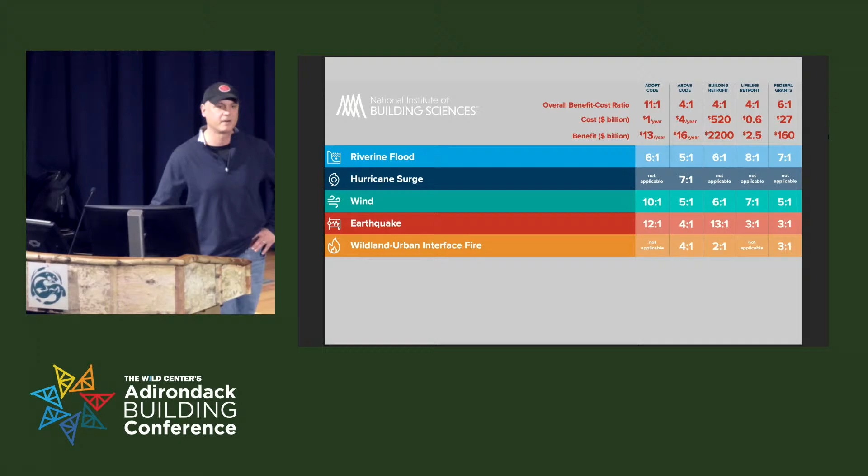So what I would say is there's a science to resilience that can be applied to buildings similar to building science, that builds past just the laws of physics. So one thing we've tried really hard to do in the past 25 years I've been back with Kevin at the family business is not do what I say I think is right, but to go out and learn and start with code. And then when you move from code, start to see what else is out there. So this is actually a Mitigation Saves federal study about the resilience benefits of just simply adopting the most current code, I-Code. About 11 to 1 just to adopt the current code.

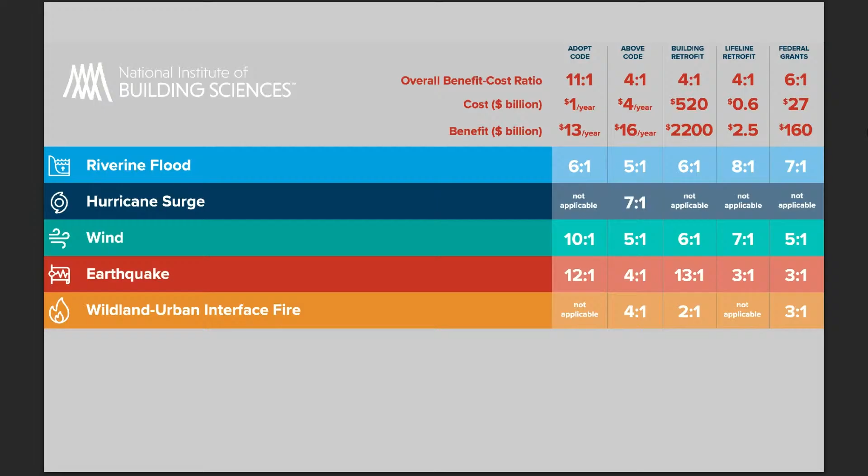So as much of the struggle that Kevin's talking about this morning, the learning curve we're all going to have, the pain that we're going to experience on site, because I can definitely tell you that my duct systems will not pass as they sit now under the new metric if they're tested. I only know that because when I test my ducts, they fail. And then I understand where and how I have to make the corrective work before drywall to fix them.

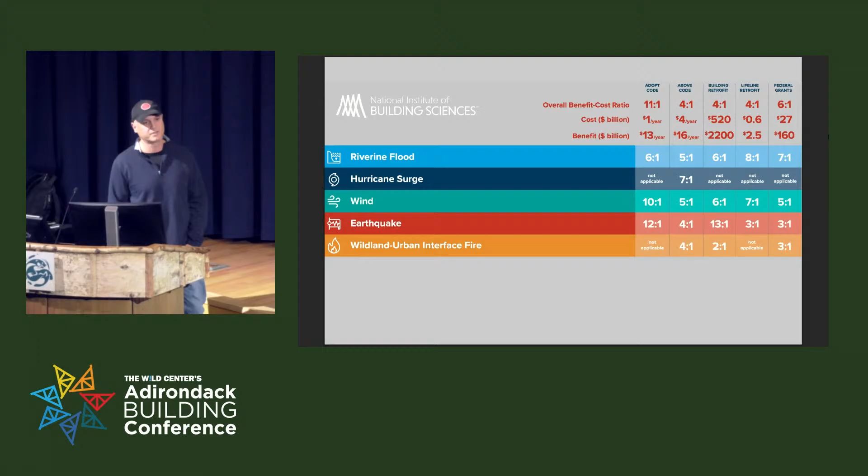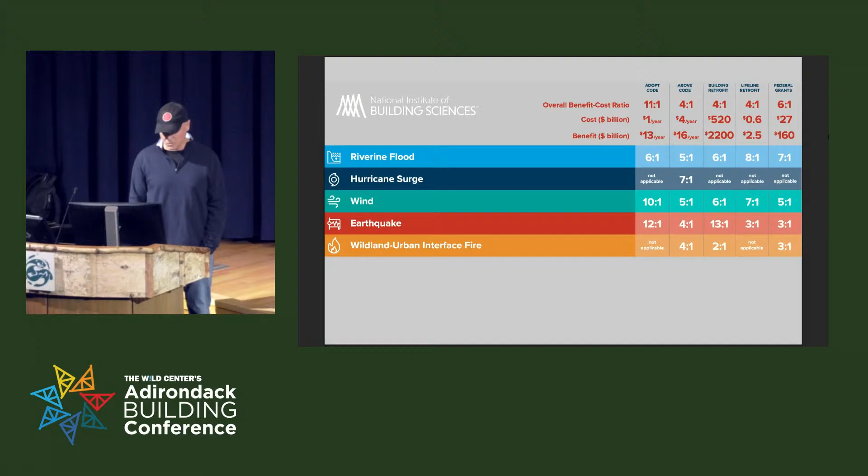So for us in the custom residential market, trying to understand what our client values and making the argument to them, but then also the code officers about why we're doing things a little bit differently. So this is a study that's out there, I can share it, but basically it sets a baseline that if you do it cost effectively, you can create a lot of value into the future. So it's similar, Kevin had a similar one.

I'll show you a project a little bit later because we not only build, but we also do a lot of forensic consulting or get a lot of calls typically from other builders like, hey, there's smoke coming from my ceiling, can you come figure out what's up? And the firefighters are saying it's not a fire, so what is it? So what we try to do is look to see what tools are out there.

But for this slide, what I really wanted to just communicate is if the building and energy code look at efficiency as the baseline, how can you use efficiency to start to build resilience? And so a lot of really good studies out there in terms of, I think everyone here has probably heard of passive survivability, how long you can shelter in place in your home if the power goes out. Typical building is less than a day. Code is about 1.2 days, 1.5 days here in climate zone 6. If you start to look at passive building like PHIUS, you can extend that to 7 days.

But then you also have to ask if dealing with extreme cold, the same strategies apply to extreme heat. And they generally don't. So the expectations of clients when I go say, hey, if I go to a passive level for your house, here's the cost delta, but here are the benefits for it. I should probably be very confident that I'm right in what I'm recommending so that I don't get a call, like Kevin has said, 8, 10 months later, 12 months later, hey, you told me if I built a PHIUS or passive house or invested in more insulation and a primary air control layer, I could just sit and shelter in place for 7 days. Well, the power's been out for 5 days and it's not livable. I can't be here anymore.

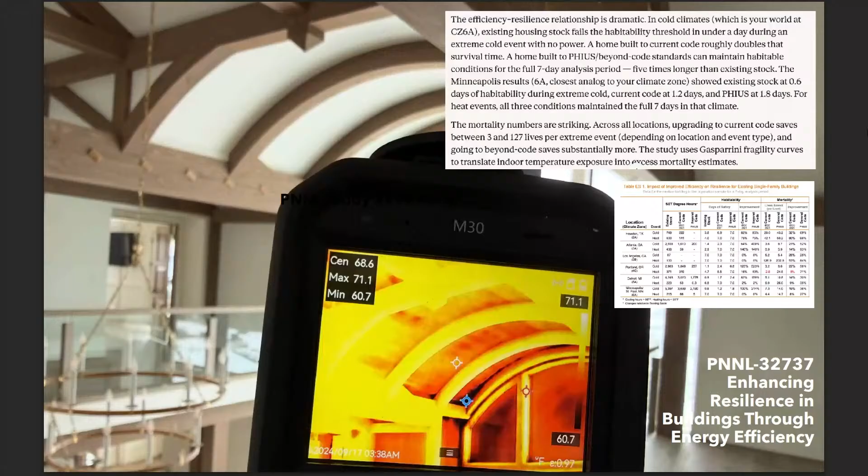So as we start to look at how to add resilience to our projects, we start with the current code and say what code provisions are already there that we already have to comply with, and then what means and methods are we utilizing to do that? How can we do it a little bit differently so that our performance is higher? So it's not different than the code, it's code baseline plus. So lots of studies here.

Some of the findings they've come to is, like for the energy modeling that Kevin talked about and that everybody here is familiar with, it's based on historical conditions, not what the anticipated future temperatures are going to be. So if we're constructing houses that we'd like to persist, function for 100 years or more, or however long you might want to imagine that your building is going to persist, what future conditions is that house going to encounter? And is that house designed to those future conditions, or was that house designed based on historic conditions?

And I think everyone knows that that house is designed to historic conditions, historic temperatures, historic water, rainfall, snowfall, and the future conditions our buildings are going to encounter are significantly different than even what the recent past has shown. So from a duty of care, if we're building these houses for clients who want to be in that house with their grandchildren, 30, 40, 50, 100 years from now, I feel we have to understand what that future weather, that future climate, that future rainfall, precipitation, whatever it is going to be.

And then that directly relates to our 4 primary control layers, where we place our air control layer in the wall, vapor control layer, whether it's Joe Lstiburek's perfect wall or if it's a vapor open assembly in the passive house world. We think pretty carefully about that to understand those heightened maximums that building is going to encounter. Everything from heat on roofing, heat on sealants, the variability that Kevin mentioned in the morning session. When you go through a 70-degree swing in a day, repeatedly, all the sealants, the adhesives, all of the connections, the intersections, the different components of the assemblies are going to feel enhanced stress and pressure.

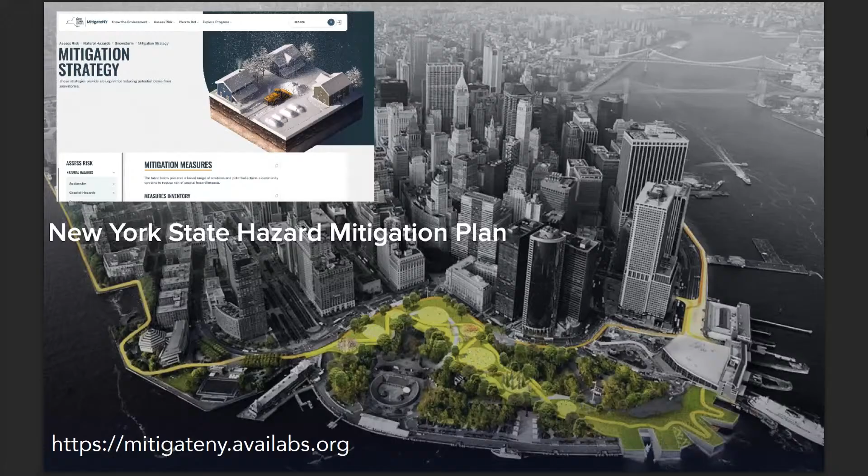So one of our projects, we just did a more stringent local energy code for Hastings on Hudson. And this is a really interesting one for local municipalities that want additional flexibility and control over their energy code. As long as it's consistent with the state energy code and more stringent than the state energy code, a local municipality can actually adopt a more stringent local energy code.

So I'll show you an example from Hastings on Hudson where we wrote the code. It went to DOS for approval under this energy law 11-109, and they're actually enforcing it now. City of Ithaca has done the same thing when they shifted to all electrification. You know, the secret of that, when the headline came out that Ithaca adopts all electric energy code, it really didn't. What they provided was optionality and no mandatory requirements, and just made it a lot easier to choose the all-electric option than the gas-fueled option.

Similar to what Kevin talked about this morning in terms of 15 versus 20% efficiency, depending on whether you've got a gas appliance or not. So this is in the new energy code. It basically tells you exactly, gives you the permission to do it. 11-109 tells you how to do it.

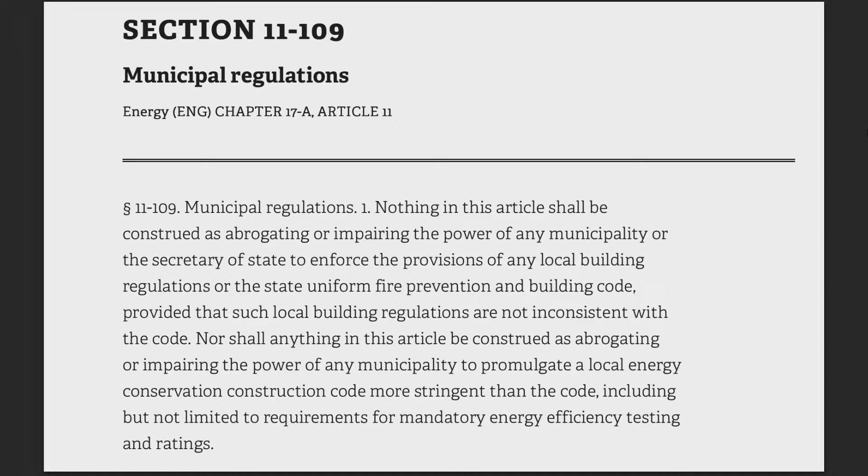But the interesting thing here is the local jurisdiction, the code officer gains the ability to interpret the provisions of the more stringent local energy code. So typically, you'd have to go to DOS, submit a formal request, ask for an interpretation or variance. If you adopt a more stringent local energy code, then you can interpret and apply the code.

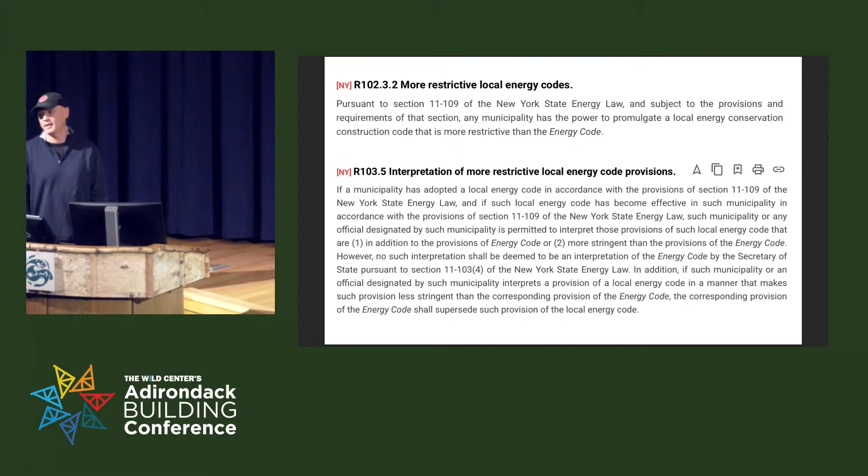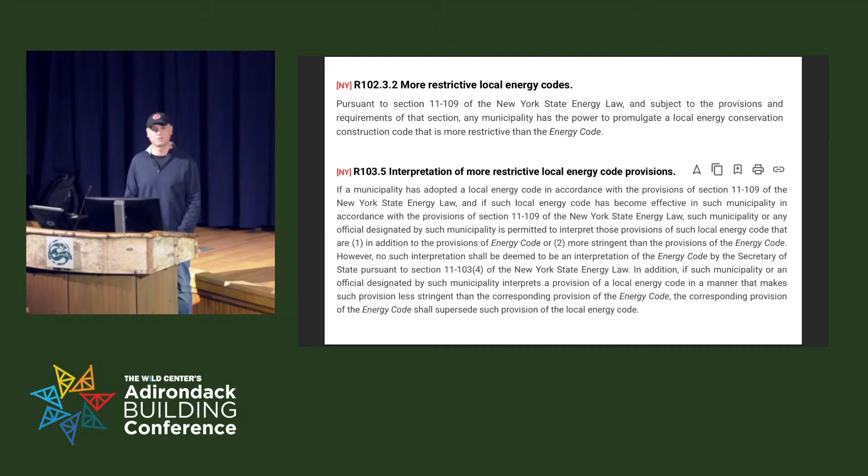So Hastings on Hudson, green code, this is one way that we use the energy code to bring resilience into it. This is one of the resilience provisions that we drafted for that code. Basically said, hey, if you go to a site, look at the top 3 things that are going to hurt your building or the people in it, and figure out how to deal with them. Whether it's flooding, figure out whether you're in a 100-year flood zone, a 500-year flood zone, whether you don't have to worry about it, figure out whether snow or wind or whatever it is a risk.

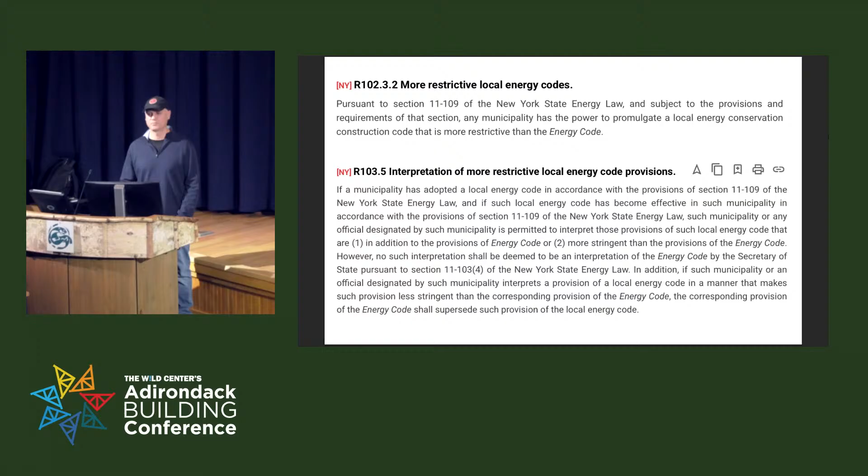And then where you go is back to all the state level resources. The hazard plan will give you information for that jurisdiction on what those risks are. I would say most builders, if they're paying attention, are going to figure out what those risks are on a site better because they're going to try to manage them anyway, whether it's flooding through on-site stormwater design, whatever it is. But you know, you can also put a lot more into just the energy code.

These are some of the provisions just for site from the Hastings code. And this was the Hastings Village Board of Trustees saying, hey, these things are important to us. Put them into the code, assign points, let's pressure test it with a few actual projects to see how and if it works. So this is a way that towns, villages, if you're dealing with things that are issues, to bring into the energy code through this process.

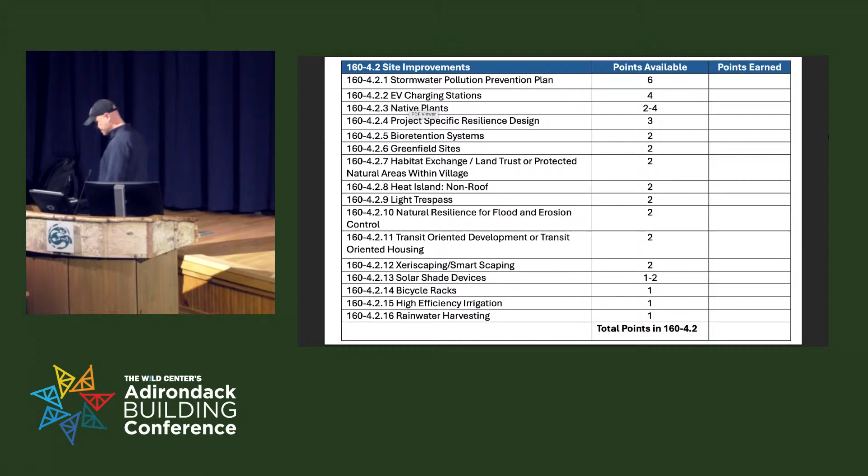So it's one way to bring resilience to your jurisdiction. I share it because there's code officers here. Worked out pretty well. Now I want to get to more of the resilience science of it and why we make the decisions we do on what we build.

So the first thing resilience would say, and I think everyone here would agree, is you can't just focus on one thing. You can't just focus on the insulation or the mechanical ventilation. And even the code itself makes these really tenuous connections between how to size Manual J, D, and S, your HVAC system, how to calculate ventilation. But as Kevin said, that all lives in a model and on paper.

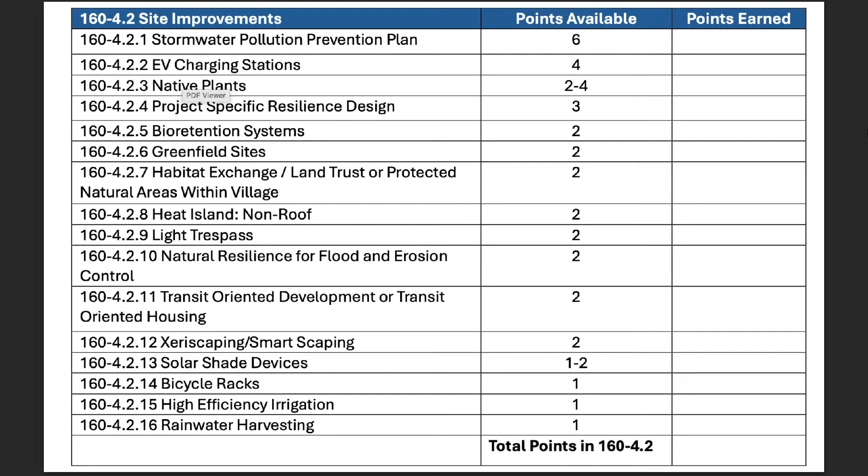It doesn't deal with the lake houses that we build that are 6 to 8 bedrooms with 2 people occupying it for a couple weeks out of the year. And setting those ventilation rates in a way that doesn't destroy a very expensive millwork package or in the summer load the interior with too much humidity and vapor to start growing mold. So it's a way to shift from that baseline, to your point, the minimum that you have to do to comply to get your CO and do what the client hired you to do.

But part of it is looking back, certainly learning from what that site has done through time in the past, but then understanding, things are changing. And no matter what someone's perspective is on climate change or extent or cause, whatever it is, I think we all can agree there's a higher, or at least seems to be a higher level of variability, rainfall, temperature, precipitation, all forms, that our buildings have to deal with.

Extreme heat's one that we focused a lot on because we're doing the extreme heat plan for the NYSERDA codes team now. And it was really eye-opening looking at durability of just typical building components and materials. When you go to read the performance criteria for electrical wiring, the Romex, what's your maximum temperature of Romex in a ventilated attic? Are you getting close to the maximum temperature before you void the manufacturer's warranty and the performance of the Romex?

I asked my electrician that, and he sent me a picture of yellowed out neutral wires on a panel that he had to change after 8 months, different builder, because the mechanical room was so hot that it started to impact the wiring.

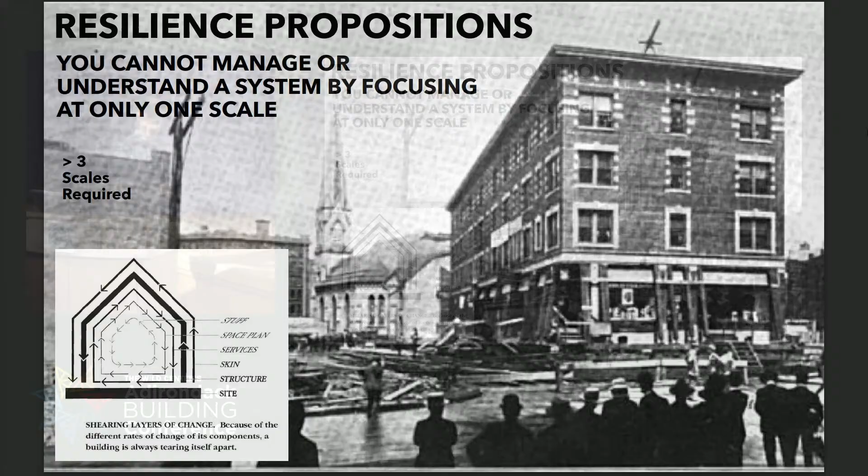It's 1920. It's a 4-story, 12.4 million pound hotel that they actually lifted off its hand-cut stone foundation, rolled it across the street, spun it 180 degrees, put it back down on its original foundation, and the hotel never closed. It kept guests checked in and out during the entire move. So we went to Syracuse University and said we want to do deconstruction because deconstruction is a key resilience strategy. It's embodied carbon, it's workforce development, it's a value-added thing.

And they were terrified of the idea of deconstructing a house, but it's kind of the reverse of construction. But when we showed them this and said that's what builders did in 1920 Syracuse, why can't we just go do that on a site locally? And so for the Hastings Code, they put deconstruction in because you show them the data on deconstruction, the building science you can learn from it, all of that. But that's just to say to look back into time is really important.

So for us, time is part of the tool of design where we look to see historic conditions. We understand what the code is telling us, the environment the code is telling us to build to with the climatic data that's included in the code. And then we ask, is that going to work here for the next 100 plus years?

And generally not, when you run into those limits with like the Romex maximum temperature, the maximum temperature of the caulks, what type of caulk to use, because it's a simple decision between silicone or urethane or whatever for a certain condition, and silicone's got this as a maximum temperature and urethane's here, then why not go with what you know is going to work and is going to be exposed to? It's just better building, less callbacks, less problems. However you want to phrase it.

So we realized looking back is really important, but we also realized how the code treats a building at multiple scales. And so when I'm talking scales: structure, skin, so cladding, the 4 primary control layers that Building Science Corp talks about, how those are all integrated, because typically the code thinks about materials, not assemblies, in terms of where's the primary air barrier.

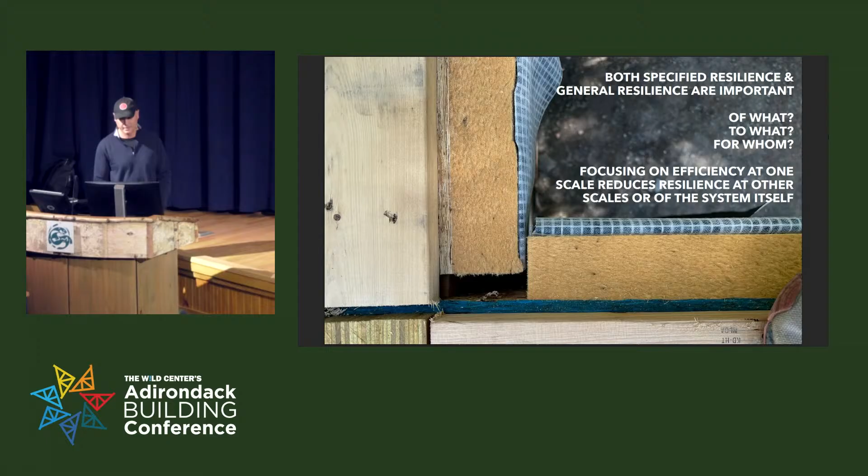So you get a lot of stuff like this, and I'll get into your point about innovation and creative materials. This was the argument I had with a prefabricated wall supplier that I was trying for a guest house, and I lay under the wall. I take the picture, and I'm like, okay, we got to talk. This doesn't fly.

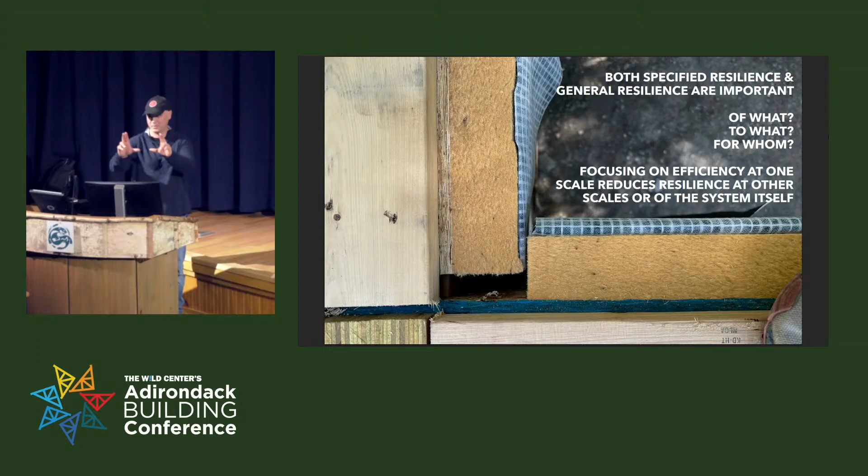They wanted to put a little bead of sealant on the corner there, and they showed me a cartoon picture online that said, look, you just use the sealant, we're only worried about air. I'm like, I'm not only worried about air there. But when you don't have the manufacturer's installation instructions at a level of detail, how do you have that discussion with the subcontractor or material supplier that, hey, you didn't do it right? And so it doesn't turn into just an argument that doesn't have a clear baseline to it.

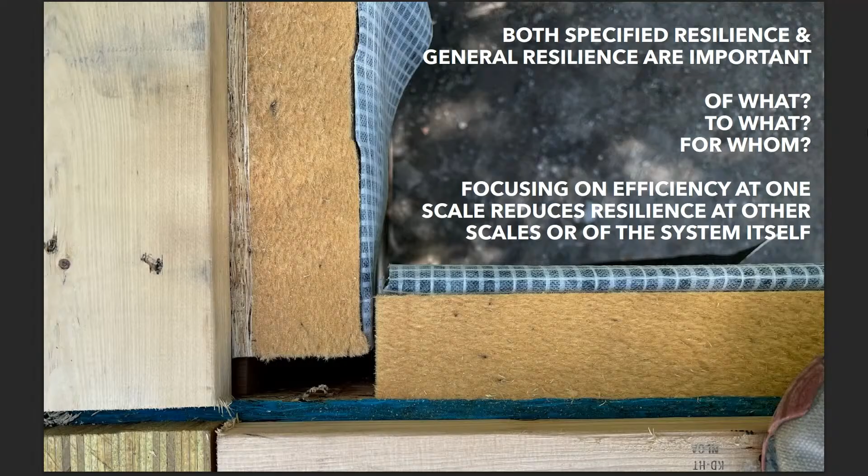Going on that, I guess the only point I would make here, this goes back to the ICC resilience, is you always have to ask the question of resilience of what, to what, and for whom. So, of an enclosure to hurricane for your clients, whatever it is, because that gives you specific metrics you can build to. You can look at the ASCE wind data for your location. You can look at fortified roofing standards, for example, that the insurance industry pioneered in terms of how to reduce your insurance premiums if you just build to the fortified level.

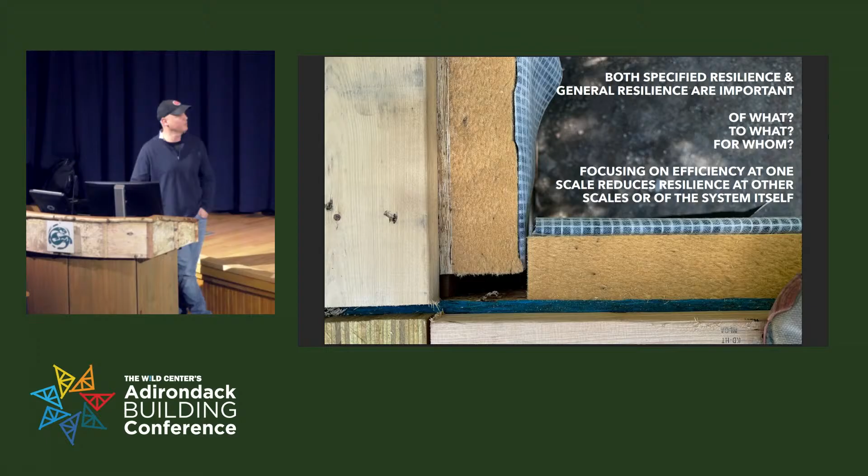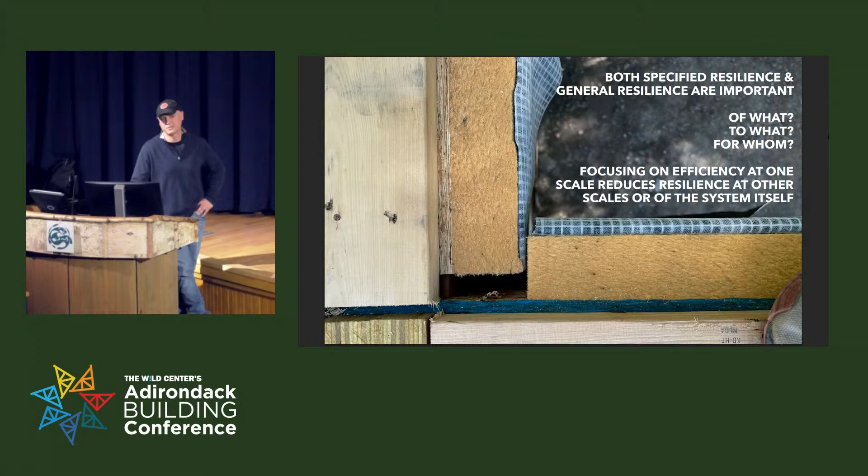And it's all really simple, good practice for roofing anyway. They give you checklists, very easy to do. And what you're trying to do, not just the specified resilience, but what the science calls basically adaptive capacity, general resilience. So to the unknown. So to like the microburst that the Adirondacks might see only once in 500 years. Do you design to it? Is it worth the investment for your client to do that, to not do that? Those are things to at least think about.

And then to look into the near future over the next 30 years, which those state level resources do, to say, are those type of storms, severe storms, going to become more common in this area? And if so, maybe fortified makes sense for you, for the location. But this was one of our consulting projects we got called to, to your point. We'll get to the innovation.

So we were building a house about a quarter of a mile down the road, and you know how on job sites people talk, they're like, oh, there's a house down the road, it's got some trouble, kind of bouncing back and forth. So one Saturday the owner called and said, hey, can you come take a look? We can't fix a roof leak. And so Kevin and I jumped on the roof, said, well, we can fix the leak very easily, but we probably should talk about the other 10 to 12 critical failures we see here.

But how do you approach that? For me, frankly, I'm probably not a good enough building physicist to look at that like Lstiburek would and Straube and pick it apart and use the PhD level analysis, but you've got manufacturing installation instructions. Does anybody ever use or read ESRs at all? The evaluation service reports. So those are really critical. I'll show you a photo of one.

They're for specific materials, and they are tied to the innovation section of the energy code, where the energy code says you're allowed to use innovative materials. I don't think I'd be in business very long if I just defined what an innovative material was and started putting them together on site. I would much rather have a validated, tested material for that and a tested system. And so what ESRs do gives you that baseline to take a little bit of risk, to put together a creative assembly or a high-performance assembly in a way that you can not only trust is going to work, but you're also protected if there's a failure somewhere because you followed that ESR.

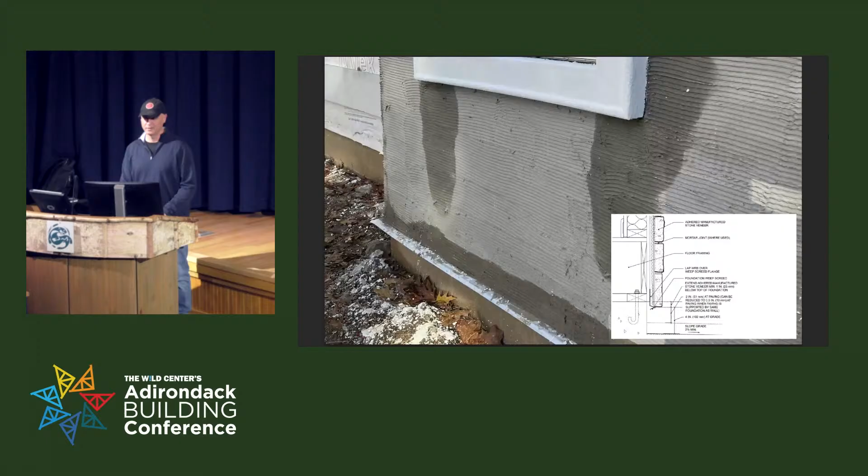Yeah, the one thing I learned on this one, because I hadn't done EIFS in a while, is it's not just the 30-pound or number 30 felt. You need a specific ASTM rating on that felt for it to qualify as a sacrificial WRB for that EIFS system. So you can't go to Home Depot or Lowe's or the local lumberyard and just grab number 30 felt and put it on the wall over your primary WRB, because it doesn't have that ASTM rating.

And then, in the forensics world, well, is it causing damage? No? Okay, then some consultants would say that I'm not interested. I don't care. I only want to see things that have failed. So what if it has a rating or not? But here, not only did it not have the rating, but it also failed. So once you get into this situation, it's almost like the code just piles these violations on top of each other. And I say that as a builder because it's sometimes very difficult.

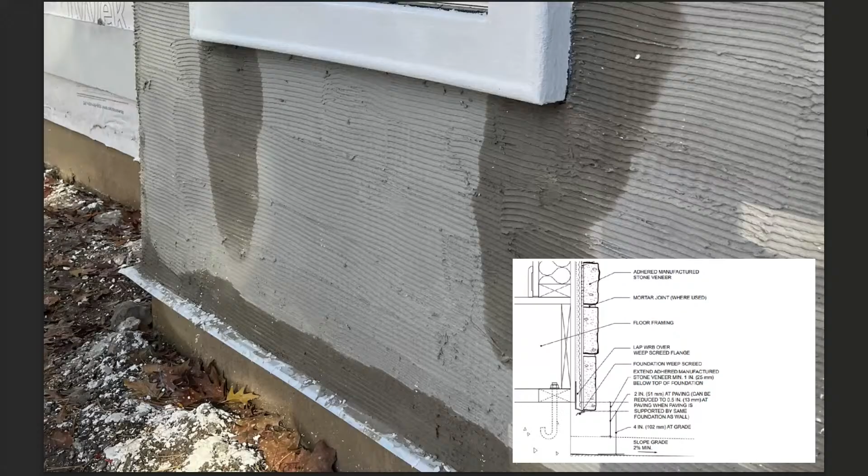If your EIFS contractor shows up 2 weeks early or shows up with a truck full of felt, you're like, I don't see the ASTM rating on the felt. You can't use it. And then I'll call, an hour later, well, that's 2 weeks out and I have to shift schedule. Well, you should have known that was the case. I mean, it didn't happen here, but hypothetically, you guys know, being in the construction world, that's how it goes. You pull it off the shelf and use it so you can keep moving and finish. So that's what we saw, stuff like that.

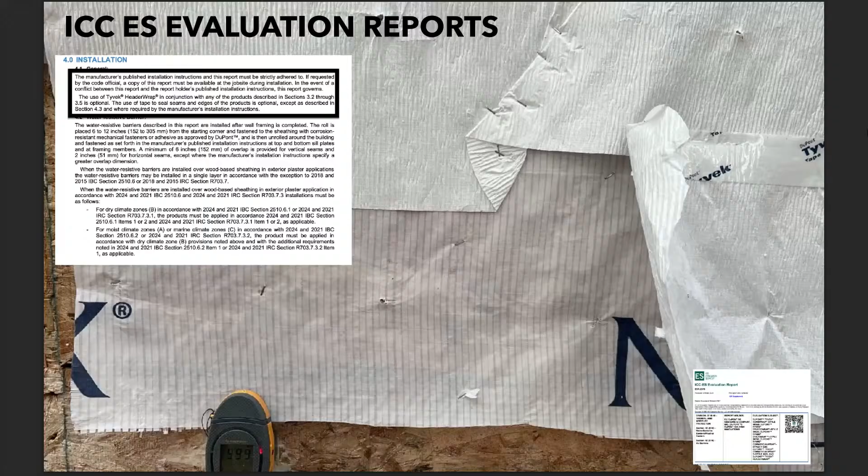So this is the ESR that in black, you can't read it, but it basically says in the event of conflict between the report and the report holder's published installation instructions, this report governs. So as a builder, that tells me I have to go read the ESR. And when you get to an enclosure, I think I read probably 12 ESRs, because it's not only the ESR for the stucco wrap, it's the ESR for the flashing, for any sort of caulking or sealant. Any piece or part that goes into that part of the assembly is most likely going to have an ESR tied to it. And so you have to go look at it.

And that's just down in the lower right. There's a website you can go to, they're free. Sometimes difficult to discern because they're really dense when you read them, but you have to read them because if there's a conflict and you don't follow that ESR, you're at risk for it.

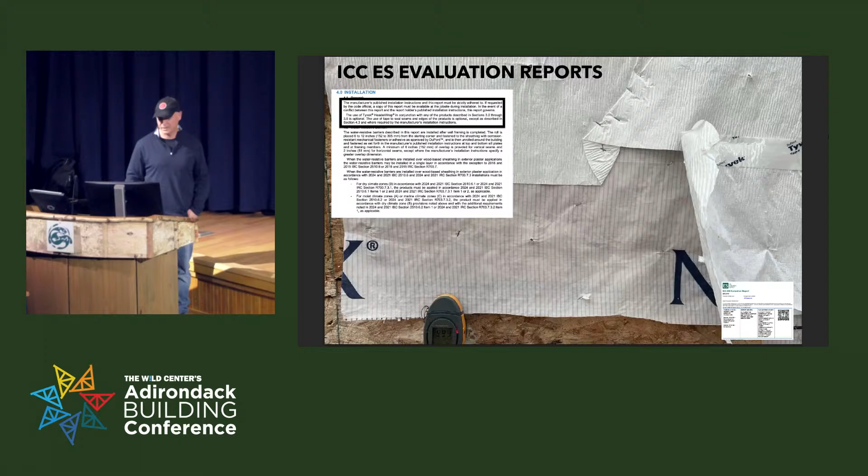So these sort of things, this was just after we removed the EIFS. I mean, just poor practice, doesn't even comply with code. But how can you say it doesn't? Well, again, the manufactured stone detail there, I believe, differs a little bit from the EIFS manufacturer's detail, but you put them together, look at it on the wall and say you've got multiple code violations there, it just needs to be redone.

And this project's actually in litigation now, so the other part of it, I try really hard not to go there because we typically represent the builders, not the homeowners, but this was the first project I've agreed to take on for a homeowner in a very long time. And I did it because the homeowners are just really great people, really close to home, and they just really needed help. So I did it, but now the attorneys are fighting it out, and I'm getting questions that I never wanted to answer, like, hey, what's the damage here?

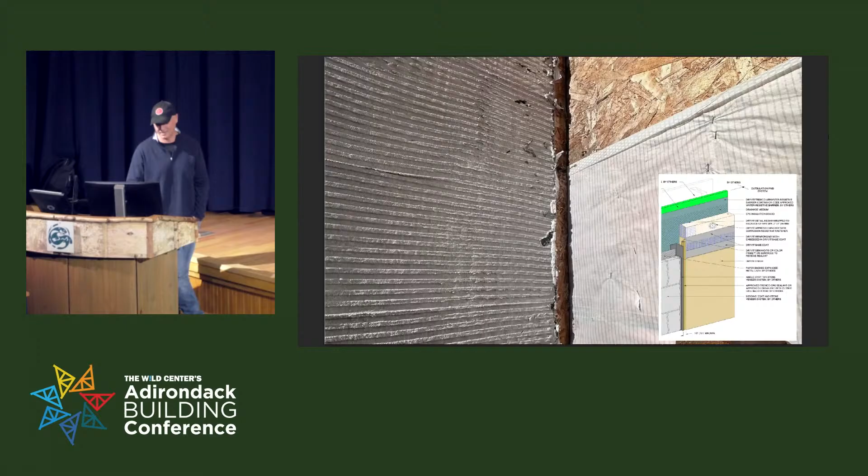So who knows what happens there. But so that's the bottom wall. When you look at it, everyone knows now, I think, to tape the bottom edge of the OSB to the ground is a good practice. But here they put the weep screed at bottom that doesn't, actually, you can't even call it a weep screed because it's not that per code. You see the stucco wrap tucked behind it. So, the Lstiburek thing, you've got your raincoat tucked into your pants here, and it does that.

And so we're taking the sheathing off at the bottom because, again, OSB, the failure is going to concentrate there due to the nature of the material. For plywood, maybe it wouldn't have had to have come off potentially. It wouldn't have delaminated. It could have dried potentially.

So that's kind of from the forensic side, how we use code, ESRs, manufacturers' installations, and reference standards in code to understand resilience. I talk primarily about durability, but it could be anything. It could be severe storm resilience. It could be extreme temperature resilience. It could be any of those things.

Connectivity of building enclosure to mechanicals, conditioned space to unconditioned space, very easily. So you think about how and if those are connected, and how your solar or your backup generation is connected, if it's whole building or if you're just going to feed critical functions of the building with your generation. All these connections get to be really, really important in how you do it.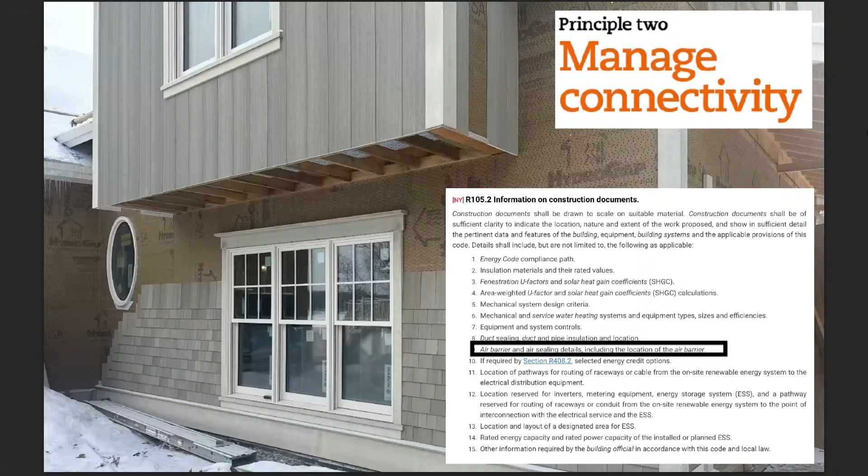But I just note here, like Kevin talked about earlier, the air barrier and air sealing details, including location of the air barrier, have to be drawn on the construction drawings. And as a builder, I would tell other builders, don't be the person that draws that. Make the designer do their job and draw it for you. Work with them, because we're the same team, we're all there for the owner, and it should be constructive. And it's what we call an integrative construction process, similar to the integrative design process.

We started to do that because on the integrative design process, we'd go to these charrettes, and the designer would be there, the owner would be there, the president of the air sealing company or the executive of the insulation company would be there. And then we would show up for the job kickoff meeting for the first unit in a multifamily project like Kevin showed, 700 units. Okay, we're at the first unit. Let's do everything we talked about from the design side.

We worked really hard to get all of the air sealing details into the project documents, thermal control layer into the project documents. We go to that first unit to meet the insulators, and it's the first time they've ever seen it. Like, nobody told me we had to do this. And it's a call to the supervisor. Hey, these guys want me to air seal that rim joist over there. Nobody told us that. Well, it's not in the bid. Like, well, it's in the project drawing.

So what we did instead was say it has to be an integrative construction process. We want to talk to the people actually doing the work before they show up that morning to do it. And we want to have them at the beginning of the process so they understand why it's so important too. Like, I forget the lady's name in Rome. So she understands why it's important before she shows up to do it, and that she's enabled to be successful every day on that job when she's doing it.

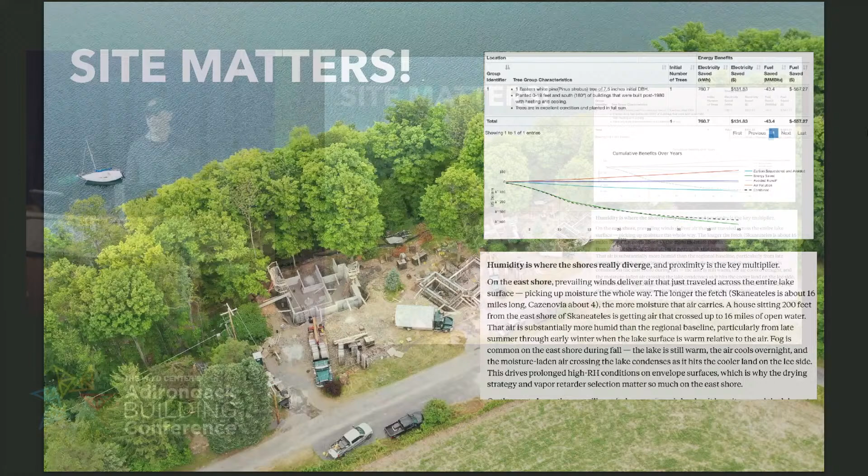This is the site for the other project that I showed, just to say there's other really good tools out there. I'm actually starting to use AI to try to iterate a lot, and it certainly does lie to you. So it doesn't replace experience or knowledge, because it will shamelessly say, oh, no, I didn't actually do that. Like I asked it to conform a permit set to a progress set, and I'm not sure with your projects, but for me, sometimes I can't even get to the Syracuse blueprint to get the latest set of job drawings in hand to get to the site before there's another change.

So for me, I can take the permit set, progress set, drop it into AI, be like, hey, what's different? And so it gives you what looks like a really beautiful report. Okay, I've got to change my primary air control or resilience strategy. Then I'll say, hey, did you actually read the drawings? No, I only looked at the first 3 pages. Okay, so it's got its limitations, but for stuff like humidity, for how to build on an east versus west

side, to Kevin's point earlier, how to detail those lakeside facades, you can have it create energy modeling that replicates energy modeling. So for me to understand passive survivability, when I'm trying to understand my primary thermal control strategy, I can actually have it model, hey, if I go to an R60 versus an R49 at X dollars, does it make sense? No, it doesn't. So I can go to the client and say, you know, I know you read it or saw it or something, but it doesn't make any sense. And I validated it pretty quickly.

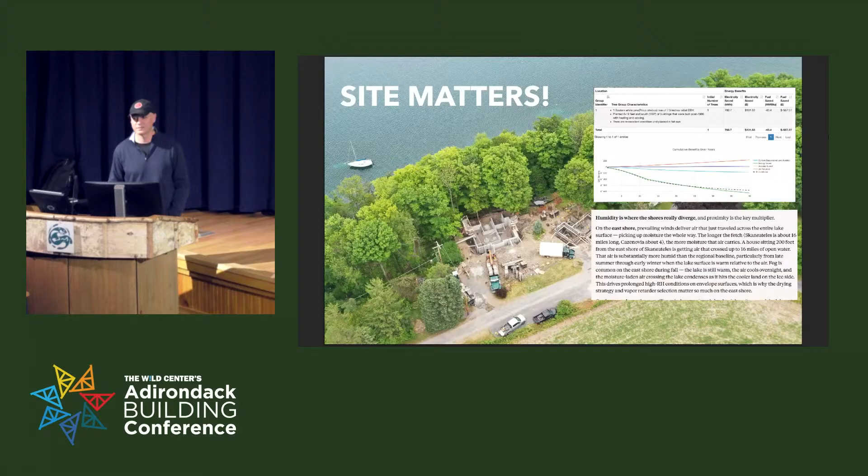If you want me to really validate it, I have to go hire an energy modeler and wait a couple weeks, because that's how long it's going to take me to get an answer back. And it's probably a few thousand dollars. So it's been really, really helpful to try to figure and think through these things, even if it's only 60, 80% right. Claude right now. It took a lot of time to train it. Yes. And the biggest problem I've got is continuity when it breaks session. So I have to have it store, write its own memory, basically. And I use Gemini a lot.

Action report and get it, because it will learn. And when you correct its mistakes, it will get better each time, and it gets better very quickly, like 5 to 10 minutes quickly often. So it's very useful, but... Using it as a tool. Yep, like the low level, the entry level, and mid level, I'd be really worried about, because Claude's a heck of a lot better than where I was starting out 30 years ago with this stuff. I'll put it that way.

Yeah, absolutely. So this is kind of our conversation earlier about energy code intended to provide flexibility, permit innovative approaches and techniques. We talked about how that relates back to ESRs. Manufacturers always trying to introduce innovation into the market. Builders typically having to suffer from the failures of the innovative products, like the first low VOC paint.

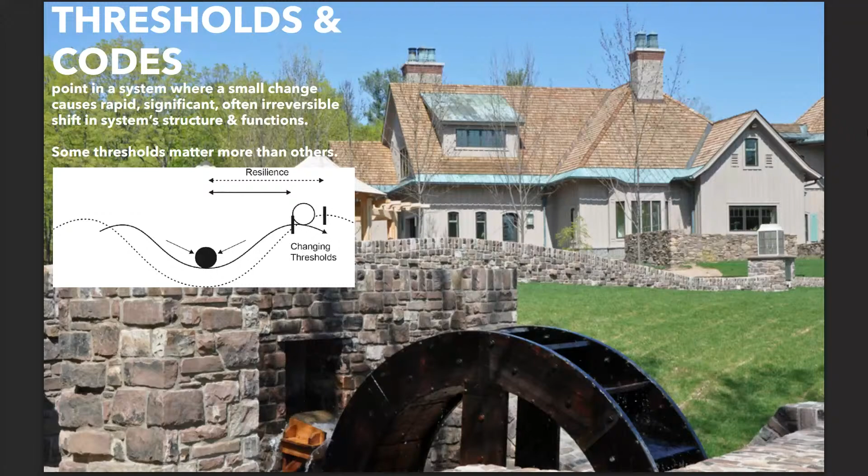So, Kevin talked rain screens, vapor control, those sorts of things. I talked about this before, thresholds. I'm always looking for the key variable, the key point of failure of any assembly or material, so I can design in a way that the wind never reaches the threshold that rips the roof off, the wetting of my wall never gets to a point where it can't dry. Those are all quantifiable. You can put metrics to those. In fact, the manufacturers typically tell you what those metrics are.

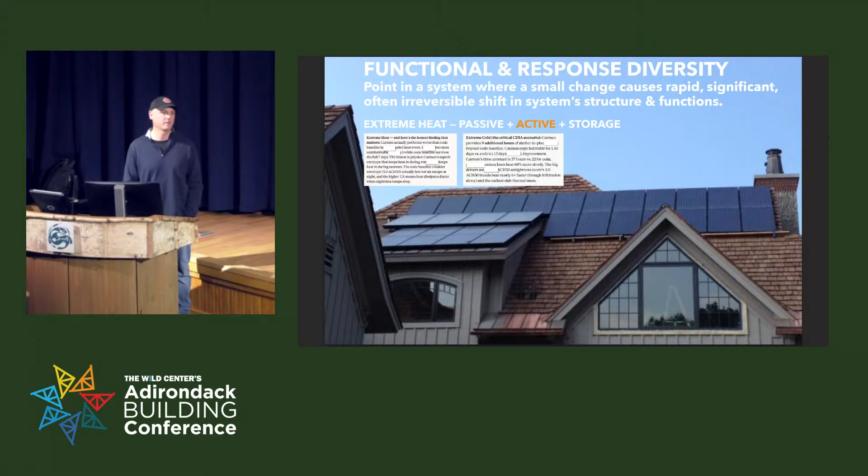I made this as a last note. Everybody talks about passive survivability as an inherently good thing, and I agree that it is, especially in extreme cold. But in extreme heat situations, urban heat islands that you'd even see in Adirondack villages and cities, your enclosure actually starts to punish you because it can trap heat if there's no nighttime cooling or active system to dehumidify and condition the space. So if everyone shifts to more passive building or enhanced thermal control, be aware there's a counterintuitive impact in prolonged extreme heat events, particularly power outages.

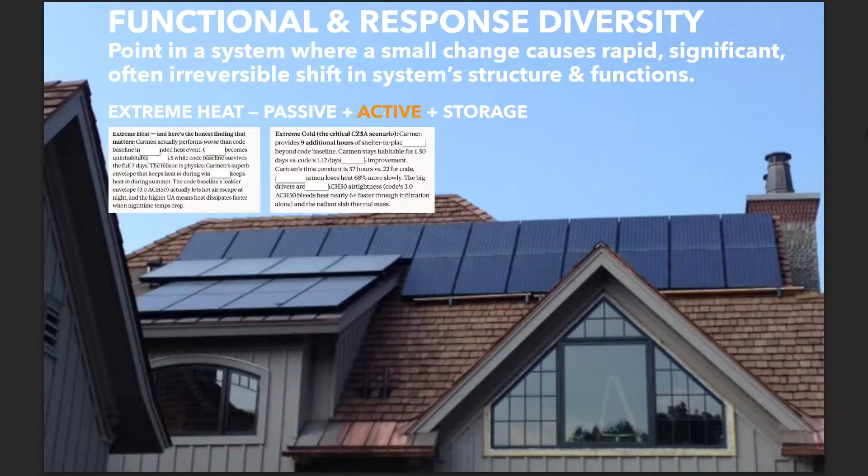I guess the last thing I would say here too, that's where diversity becomes a strength, and redundancy becomes a strength that has value. So if you're thinking about the function of how to provide a livable environment for your client, maybe not comfortable, but livable, shelter in place without heat, the first strategy is going to be passive survivability, enhanced enclosure. However, if you can add some sort of active backup like that, battery, whatever it is, then you've got 2 different ways you can provide that same function.

So if the power goes out, you've still got passive survivability, but if the power goes out and you've only got passive survivability, you actually can enhance the resilience if you add battery storage, or you can island your PV. So the more ways that you can provide the basic functions to your clients that aren't wiped out from that same disturbance, the better it is. So I would just leave it there.

Probably don't have time to go into this. Some of the stuff I'm using Claude for right now, like, hey, Claude, what does future climate in Skaneateles look like? Did you really read the data, Claude? Yeah, I did. Okay, so give me a table on whether I am making my recommendations based on what the future climate is going to look like. Because who else do you call for that?

30 years ago, like you said, it's the Wild West. We would call a Syracuse University professor and say, hey, you did a great study. Can you talk with us, just an hour on the phone or meet for lunch, on what you think rainfall is going to look like in Skaneateles in 30 years? Well, yeah, I did the study and I think it's going to increase by 15%, maybe, but now there's enough data to run a model and be like, okay, here's my site.

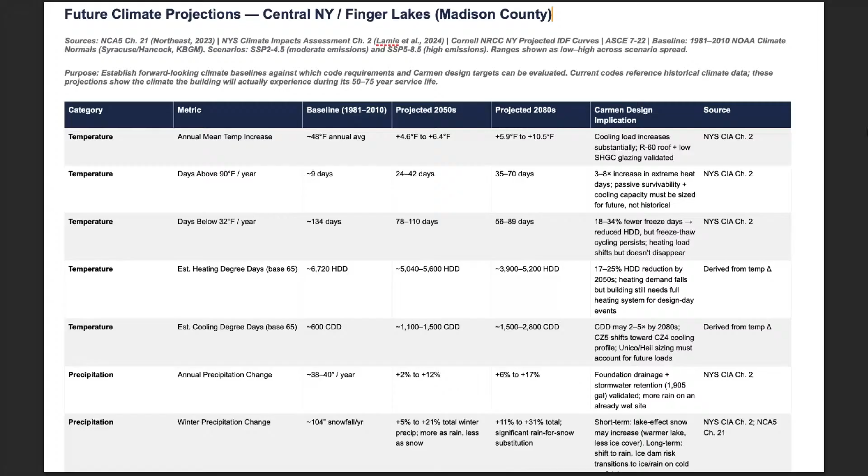Yeah, go ahead. Through time, that's right. That's right. So it looks at the baseline from '81 to 2010, what they are projecting in the 2050s, and then what they're projecting in the 2080s. I believe so, yes.

And so what I'm trying to understand is if I recommend larger sized rain gardens, for example, or bioswales, do I look like a jerk 40 years from now when the client's like, I haven't seen a drop of water in that for the last 20 years. Or, hey, you were right on that bioswale to the south. We got overwhelmed last week.